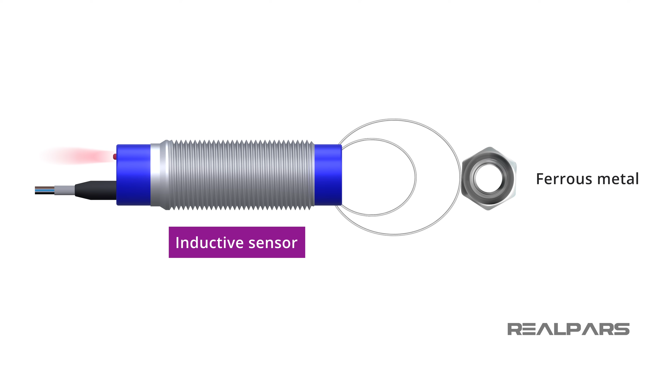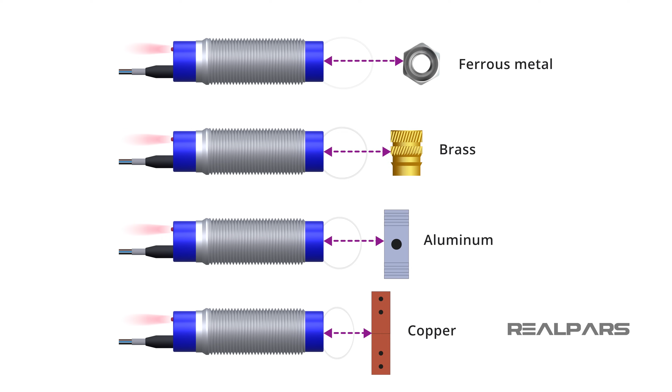An inductive sensor is an electronic device that can detect ferrous metal targets without physical contact. Inductive sensors will also detect non-ferrous metal targets like aluminum, brass, and copper. But using non-ferrous metal targets decreases an inductive sensor's sensing range. The sensing range of an inductive sensor is the distance from the sensor's face to the maximum distance the sensor can detect a metal target.

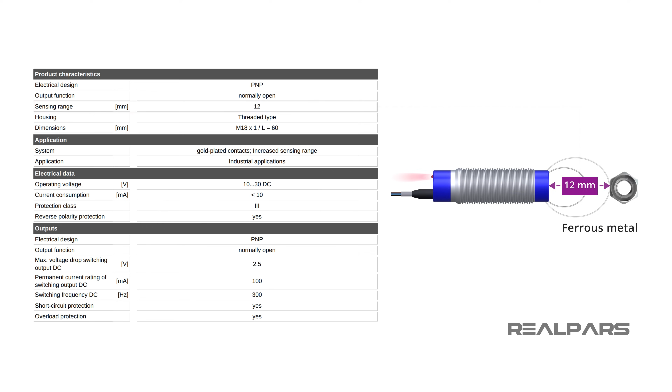The sensing distance can be found on the sensor's datasheet. The datasheet will also show some correction factors when you want to detect a non-ferrous metal. Non-ferrous metal is a type of metal that does not have a significant amount of iron in it. Brass, aluminum, and copper are examples of non-ferrous metals. This means these metals do not have a significant amount of iron within them.

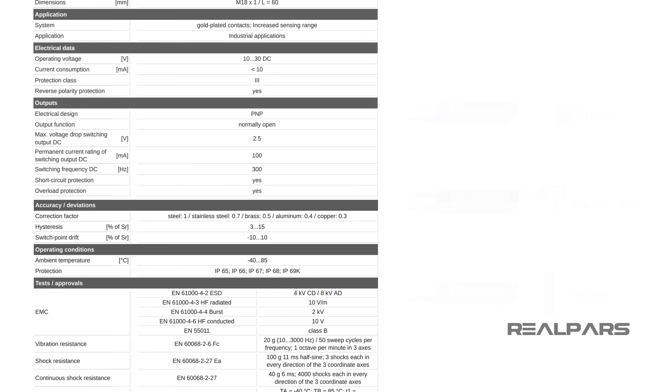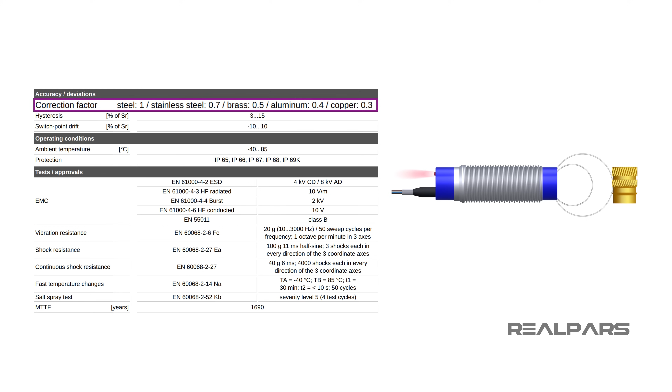Here, for this inductive sensor, the datasheet shows the sensing distance as 12 millimeters. This works only when the object is steel, which has a significant amount of iron in it. If the object is a non-ferrous metal, meaning it does not have a significant amount of iron within it, you need to consider a simple correction factor when defining the sensing distance. For example, here it says if the object is made of brass, you simply need to multiply the normal sensing distance for the sensor by 0.5.

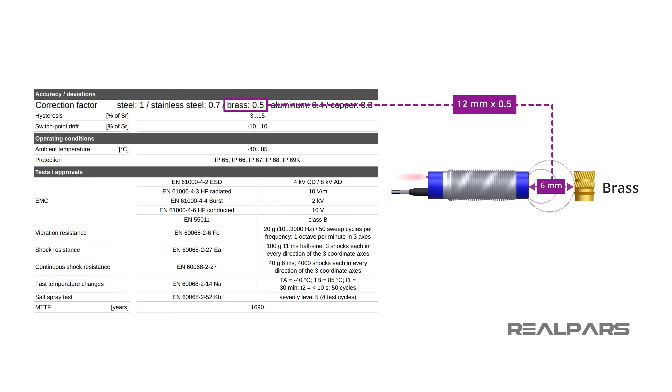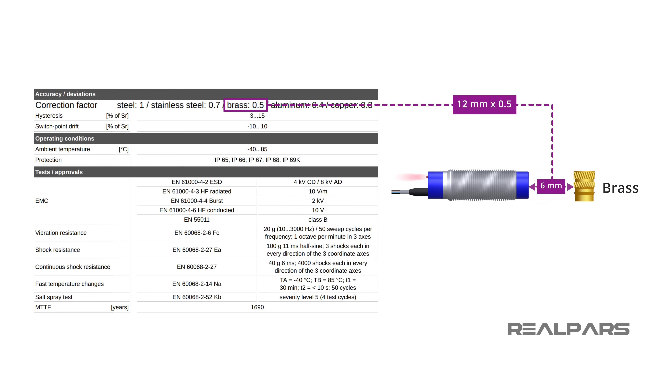So, if I multiply 12 millimeters by 0.5, I will end up with 6 millimeters as the sensing distance for a brass object. This means if I want to sense an object that is made of brass, the distance between the sensor and the object should not be more than 6 millimeters for this sensor to be able to sense the object. The same goes for other non-ferrous metals as well.

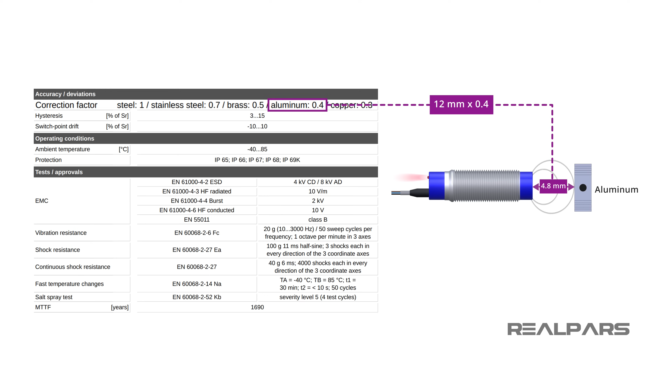For example, if I have an object that is made of aluminum, the sensing distance for this inductive sensor is 12 millimeters multiplied by 0.4. This gives me a sensing distance of 4.8 millimeters. For a copper object, the sensing distance will be 12 millimeters multiplied by 0.3, which is equal to 3.6 millimeters.

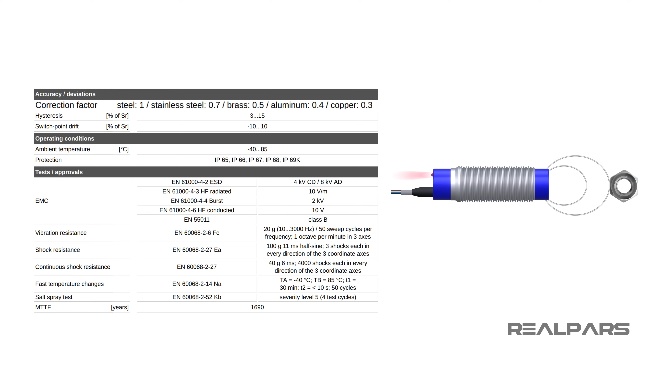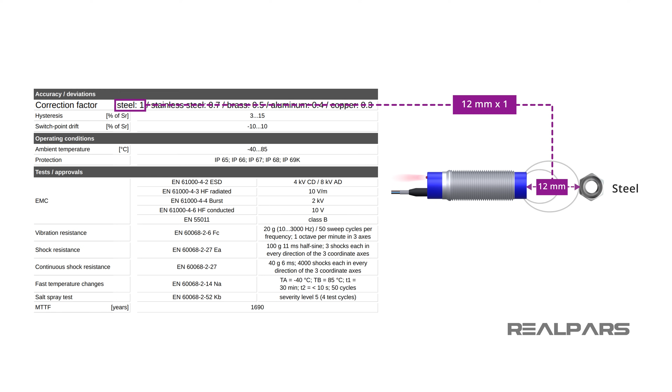As you can see, here it shows the correction factor for steel as 1. Steel is a ferrous metal, as it has a significant amount of iron in it. So the sensing distance for an object that is made out of steel is 12 millimeters multiplied by 1, which is equal to 12 millimeters. If you need the sensor datasheet and you cannot find it, you can go to the sensor manufacturer's website to get it.

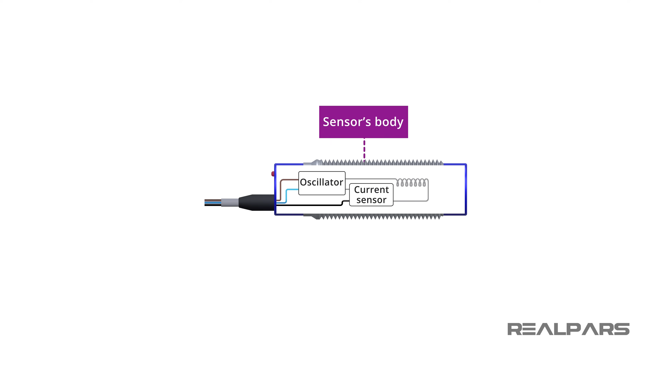The four major external parts of an inductive sensor are the body, the sensor's face, the indicator light, and the cable end or cable connector end. Inside the sensor's body is where the circuitry that makes the sensor work is located. The face is the part of the sensor that detects the targets. The indicator light is usually near where the cable gets connected to the sensor. The indicator light turns on when the target is within the sensor's sensing range.

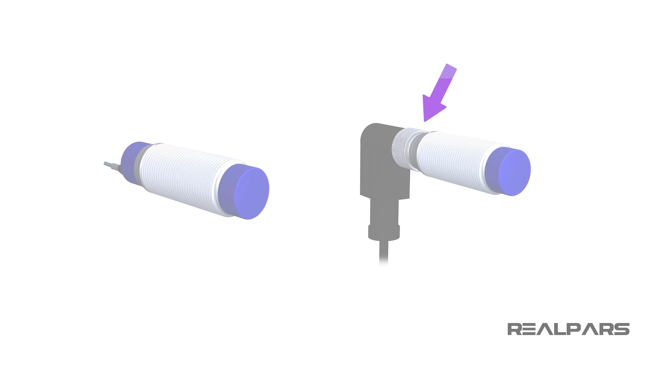The sensor's cable has 3 different colored wires in it: brown, blue, and black. These sensors are available with a cable that is already attached, or they can have a connector that the cable screws onto. How inductive sensors work is the sensor creates an electromagnetic field that emits from the sensor's face.

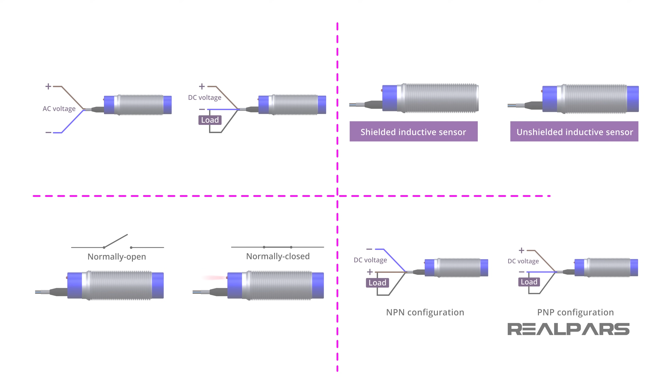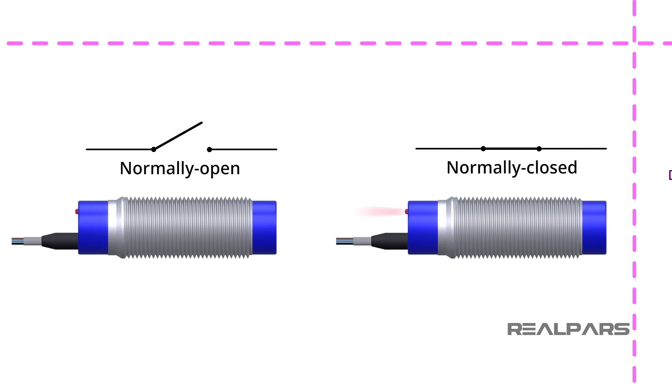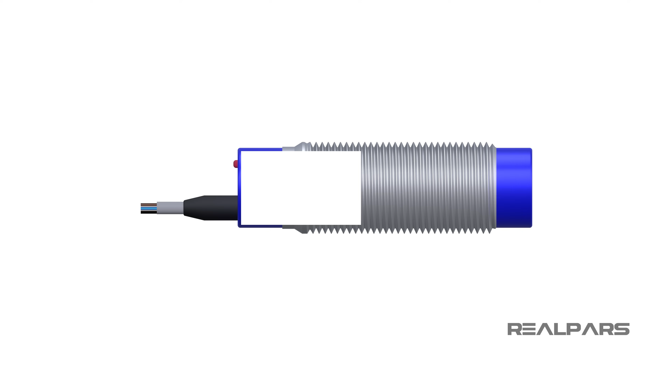Here are some advantages of using inductive sensors compared to other types of sensors. Inductive sensors are solid state and do not have any moving parts. This makes them very reliable because they usually only need to be replaced when they get physically damaged. Inductive sensors can get dirty and still work. Things like dirt, sawdust, oil, and grease will not affect how inductive sensors detect targets.

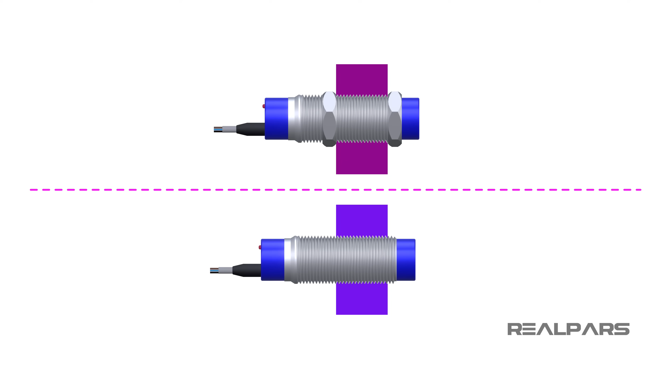Inductive sensors can also be mounted in many different ways. Depending on the type, some of these sensors can be mounted by just bolting them in place or drilling and tapping a hole that is the same size and thread as the sensor. They also make a lot of different factory mounts for inductive sensors to make them quick and easy to install.

For my example, I will be using a general-purpose 24-volt DC 12mm inductive sensor that is normally open and has a 3-wire cable already attached. I will use a bolt to trigger the sensor. To connect the sensor to the tester, connect the brown wire to the sensor voltage positive terminal, connect the blue wire to the sensor voltage negative terminal, and connect the black wire to the sensor output's number 1 or number 2 terminal. Now, let's see how an inductive sensor works.

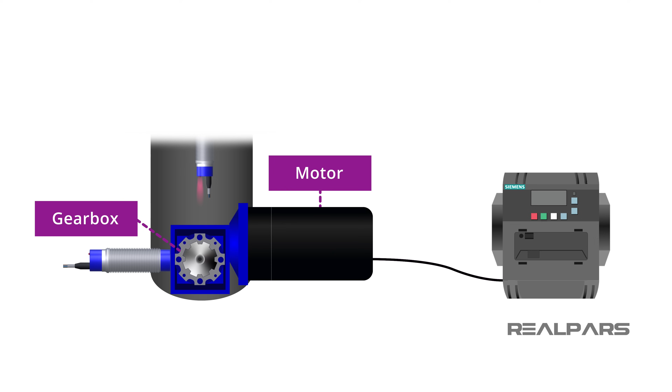Now, let's talk about some examples of how inductive sensors are used with automation. Inductive sensors can be used to detect part in place at workstations, at conveyor stops, and even at robots. They can be used to detect if an air cylinder is extended or retracted, and if a pallet stop or chain transfer is raised or lowered. Inductive sensors can be used to detect if a pallet is centered on a turntable before it starts to rotate. Let's say this turntable is rotated by a motor with a gearbox and the motor is controlled by a VFD, or variable frequency drive. Inductive sensors can be used to tell the VFD when to slow down and stop.

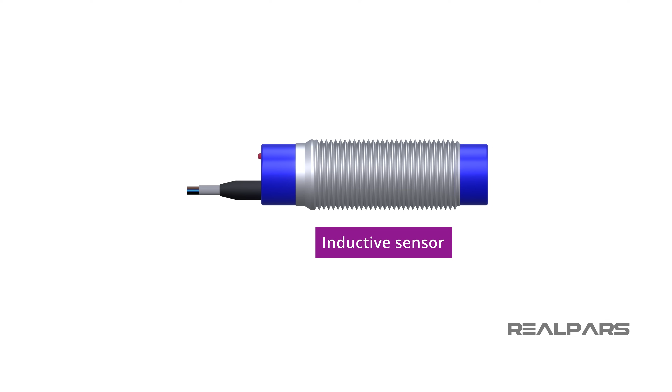In review, by watching this video, you have learned about inductive sensors, that they detect metal targets without physical contact by creating an electromagnetic field. You learned the 4 main parts of an inductive sensor, and that they have many different options to fit the needs of most applications. That should do it for this video.